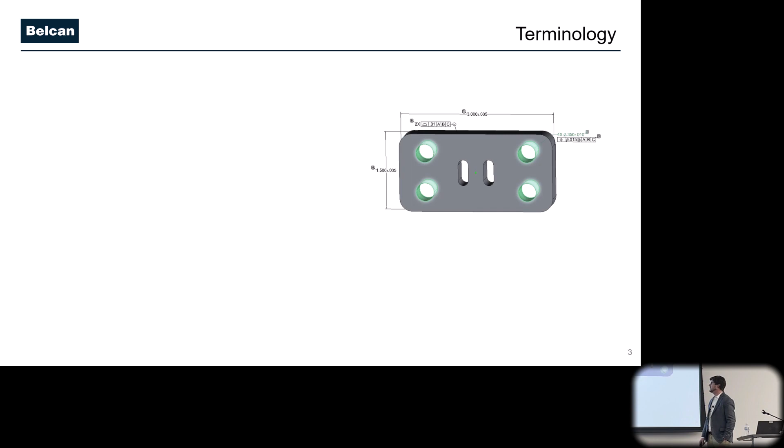So we're going to dive into some terminology, and I'll go even deeper in terminology here in a few slides. But we think about characteristic, okay?

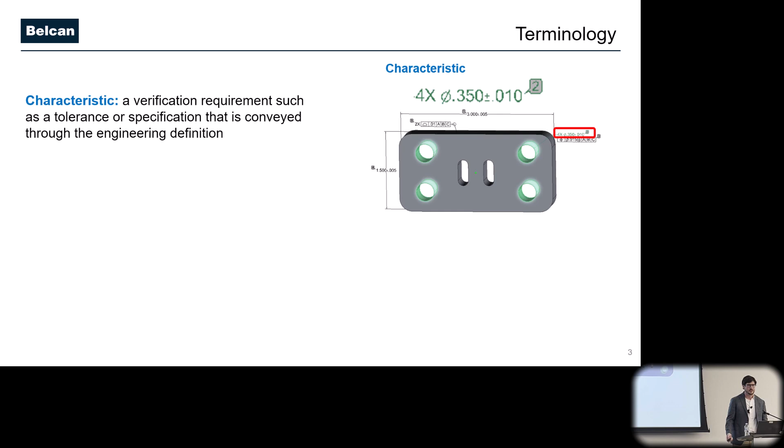This would be the dimension, the tolerance that we're authoring, whether it's in a 2D drawing or within our model-based definition. Okay, but we ultimately want to establish a characteristic tag, and this would be the graphical tag that's both human and machine readable, that is applied to our characteristic, our requirement.

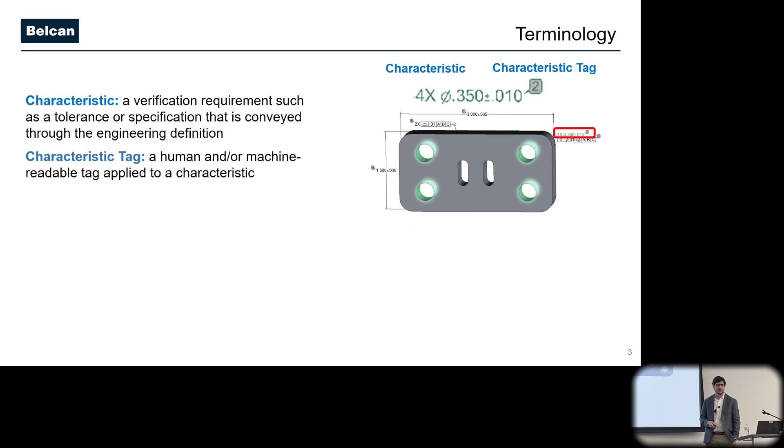And then we have our bill of characteristics, which would be compiling all of my product characteristic tags into a single bill of characteristics, and Daniel Campbell walked us through the bill of characteristics within QIF.

And then we have characteristic accountability, right? Ensuring that all of our characteristic requirements have been met with traceability through the verification process and with verification results. And so we're going to walk through this process in detailed steps throughout the presentation.

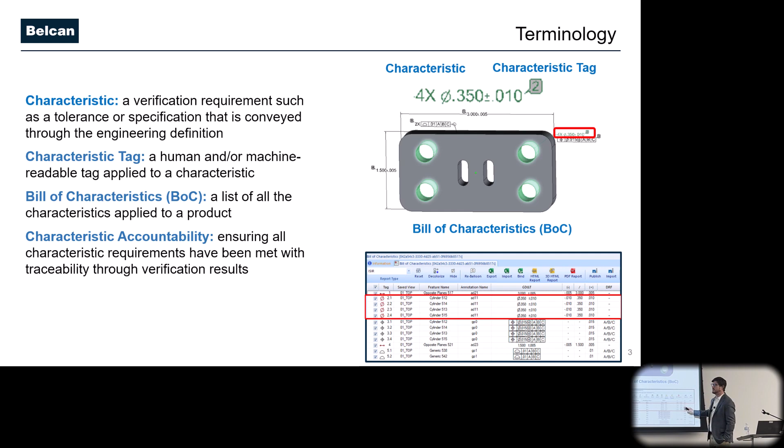I don't know if Daniel mentioned this, but you can go to QIFstandards.org to download this standard right now. All right, so I highly encourage you to do that.

So let's talk about characteristic accountability. Today, many of you are probably doing this within 2D drawings, okay? And if you pay attention to the bar at the top, when we think about an OEM versus a supplier, right? At an OEM, you're creating drawings today.

You're authoring product definition across very specific views on multiple sheets, right? Lots of product definition. You're assigning 2D specifications to those individual requirements, whether it's through 2D notes or other methods of assigning additional specifications that need to be characterized. You're releasing and issuing this product definition within your own internal OEM, but then once it gets to the supplier, or we'll call that the producer domain within manufacturing or your supply chain, they're going to characterize this data.

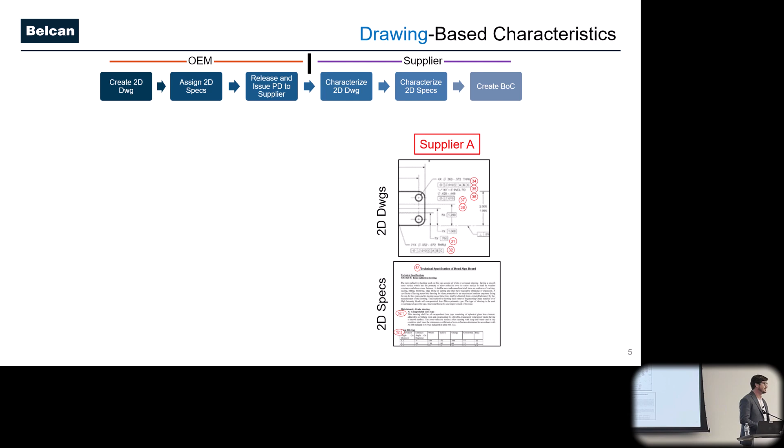So they're going to characterize the 2D drawing manually, okay, assigning characteristics. And they're also going to characterize the 2D specifications manually. And they're going to compile this into some type of a spreadsheet, into some type of a database. But our complete bill of characteristics, we're calling it complete, is happening at the end of the process.

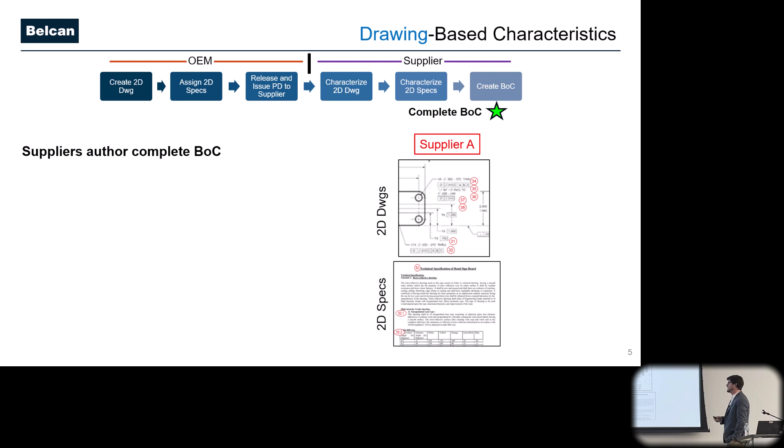All right, and that's going to be key as we move forward. So there's gaps in the digital thread. And so some of these gaps are, when we think about a single source of truth, that the characterization isn't unique, right? Or it is unique, I guess, across each supplier.

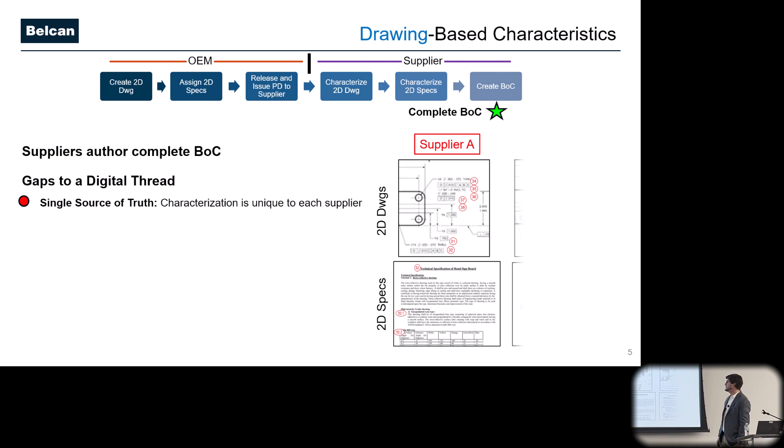So if we have multiple suppliers involved, and I had some conversations with individuals here at this conference, where you are characterizing for a single part across multiple suppliers, but those characteristics are not persistent across those suppliers, and that is an issue. This process is really time consuming, right?

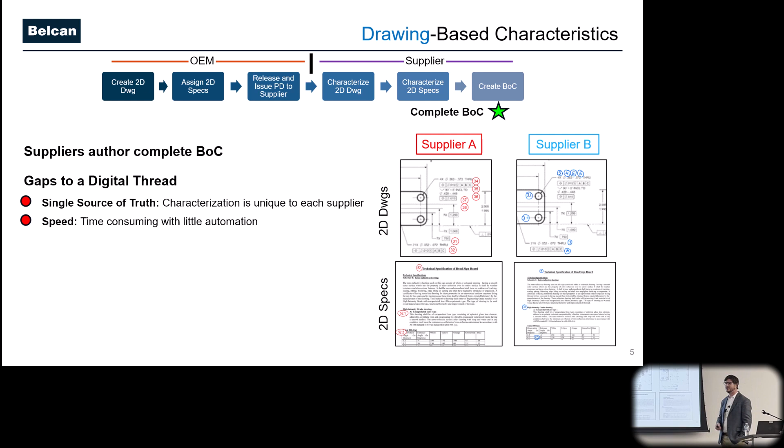It's manual, right? And it's also error prone. Okay, so from a quality perspective, it's error prone. From a traceability perspective, right, it's a very manual effort, and it's hard to align these characteristics to inspection results. And interoperability, bill of characteristics does not support machine workflows. Okay, so this is a very, very manual process.

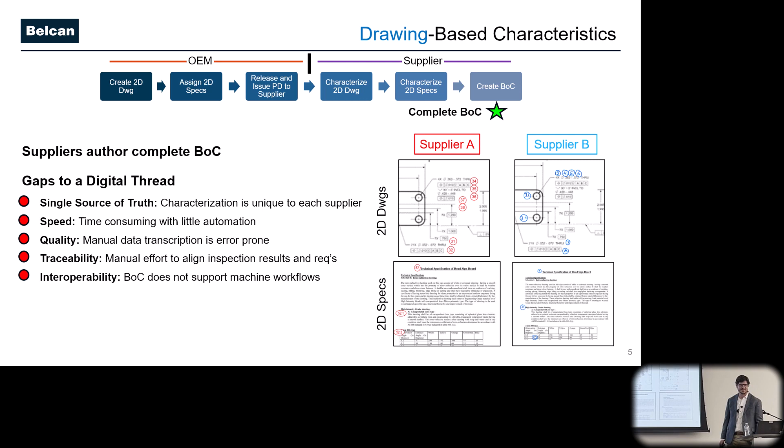All right, so let's talk about model-based definition. Sorry, I'll go back if you want to get a picture of that. Yeah. There you go, pause.

So when we think about model-based definition, this was a slide we've seen at 3D CIC, Jennifer, you talked about the elements of model-based definition. When we break it down, this was brought up at 3D CIC, and we share the same opinion, that the elements of model-based definition consist of geometry.

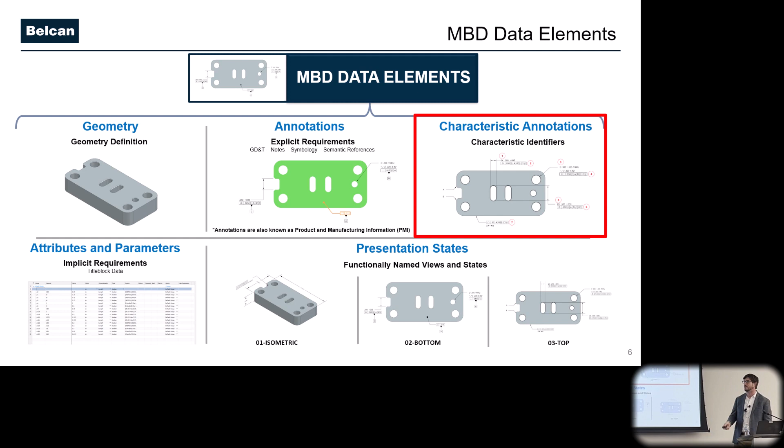That makes sense. But we also have annotations, all the requirements we're authoring across our presentation states. That's another element. Then we have attributes and parameters. But more importantly, we have characterization. We see that as a fifth element we can author within model-based definition that brings a lot of value for persistent IDs across multiple suppliers, persistent characterization across revisions. We'll deep dive into that in a little bit.

So if you look at the top, you'll notice the bar has changed a little bit. We're going to do a bit more work up front in our process to characterize our data before sending it off within the supplier domain.

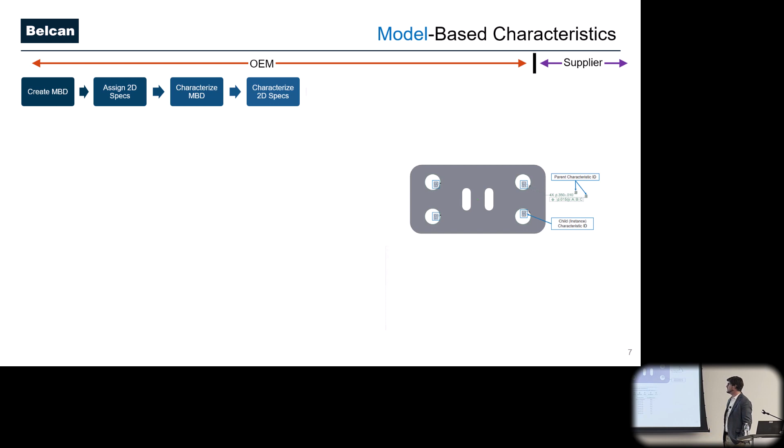So we need to characterize, or create our model-based definition. We're going to author all of our product requirements within our model-based definition. We're going to still assign 2D specifications, but we're going to characterize our model-based definition up front. We have our parent characteristic or child characteristic tags that we'll talk about in a little bit. Then we'll characterize our 2D specifications, and merge all of this to create a single bill of characteristics comprised of both 2D and 3D requirements.

And then we're going to leverage QIF, the Quality Information Framework, that format Daniel just talked about, to leverage within our downstream workflows, and then consume that into the supply chain.

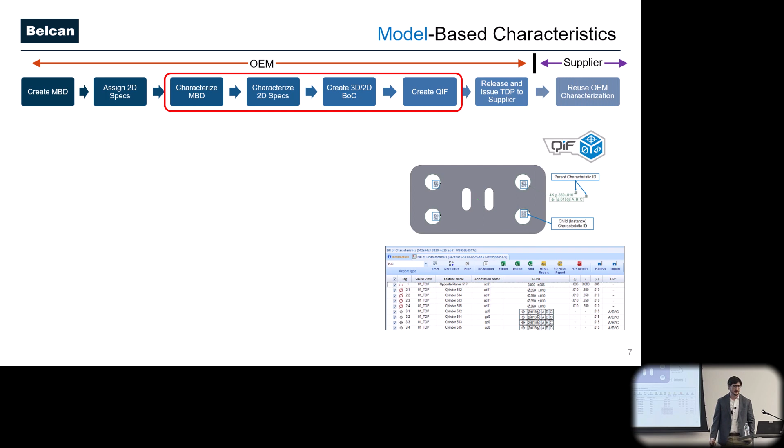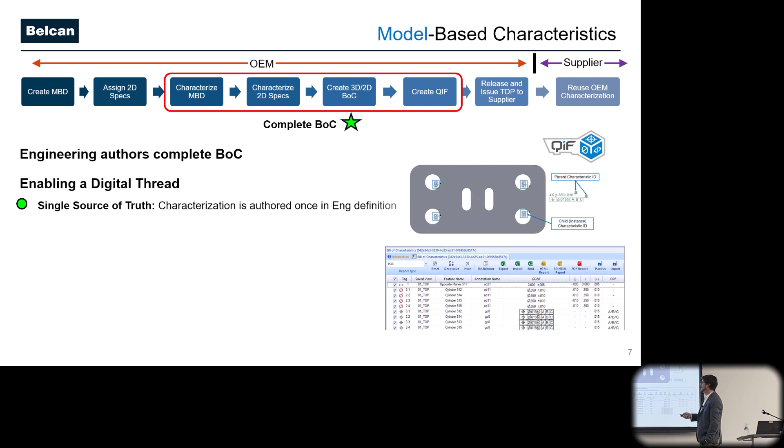All right, so now we're shifting our characterization left in the process, up front in engineering. This is enabling the digital thread for all of those shortcomings we just talked about in the 2D workflow. The characterization is now authored within the engineering definition.

When we talk about speed, automation - we're now doing this through a machine-readable format, and able to characterize our product definition up front using third-party software tools. When we think about quality, we're removing the human in a good way, so it's no longer error-prone. This is a software-integrated automated process.

So we have unique characteristic IDs, now persistent throughout all of our revisions and all of our suppliers. And we have data interoperability and consistency throughout.

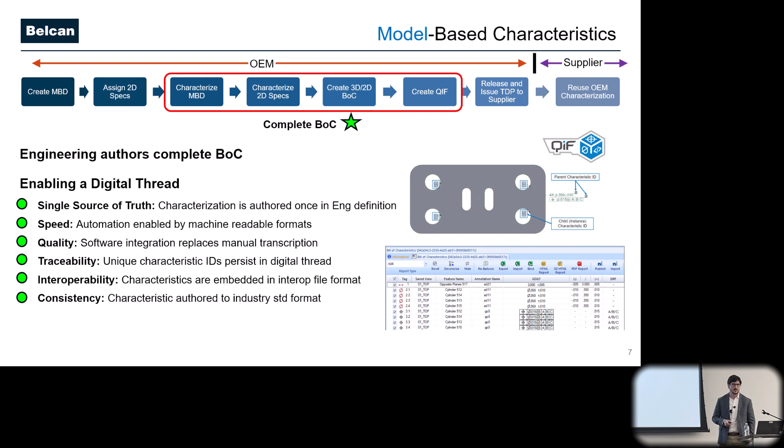So let's take a look, now that we've framed up what characteristics look like in a model-based environment, at a characteristic accountability workflow. We'll be using this diagram as we realize all of these process steps for consumption.

Starting off with our 3D model-based definition, we're going to showcase how to characterize your data up front in model-based definition, and then leverage QIF MBD to use within our quality workflows. We'll showcase how to characterize 2D specifications using OCR technology, and then unify our 3D and 2D requirements into a single bill of characteristics.

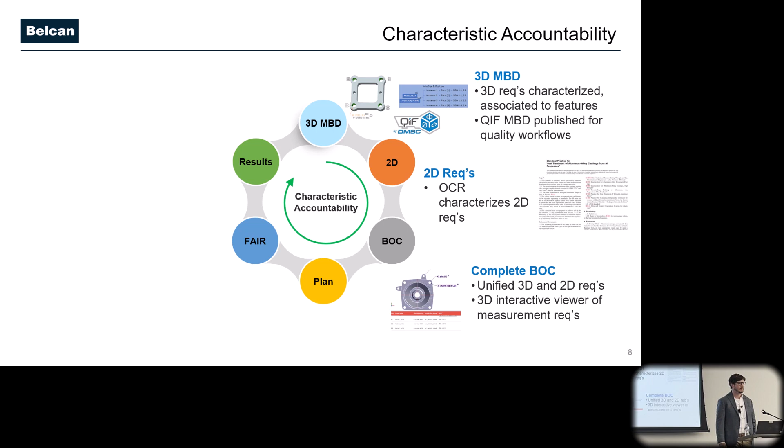And then we'll leverage that bill of characteristics within our downstream metrology software to perform measurement planning and automate inspection routines, and even generate first article inspection reports automatically. Then we'll bring it all together to showcase the as-manufactured, the as-inspected back to the as-designed, comparing those measurement results back to the as-designed using QIF.

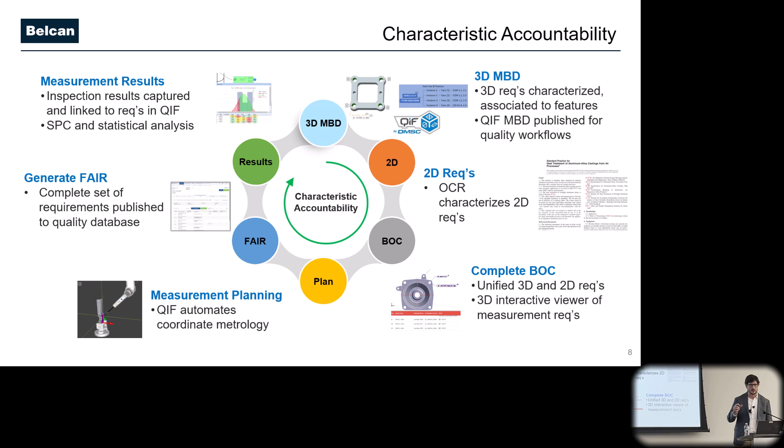So we'll start off with our 3D model-based definition. Before we get into that workflow, I want to talk a little bit about the emerging standard, the model-based characteristic standard developed by the DMSC. This is the same standards organization that's developing the QIF standard that Daniel Campbell just got done talking about.

And in June of last year, this was submitted to the ANSI Standards Organization to be approved as an ANSI standard, and that should be soon.

So this is a quite lengthy document. It deep dives into nomenclature, definition, and symbology for model-based characteristics. And it identifies specific types and categories for characteristics and their optional augmentations.

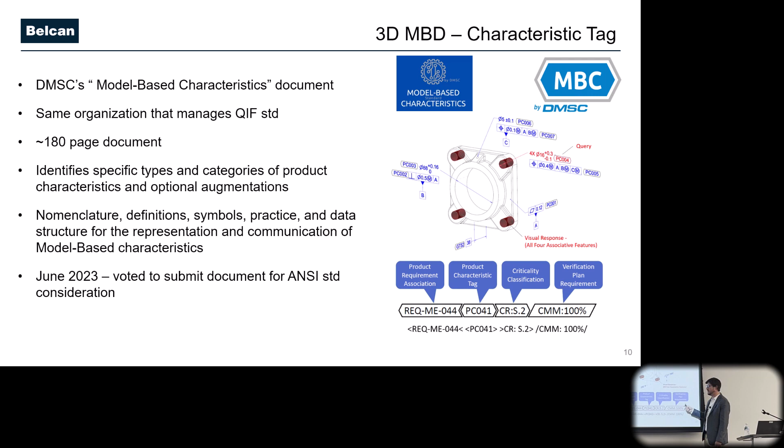So this is a product characteristic tag, the elongated hexagon, and its optional augmentations are being draped on either side of it. We have augmentations like criticality classification, product requirement association, and even a verification plan if one is desired.

So there are two primary product characteristic tags that I want to talk to you guys about. Hey, let there be light.

So this is a screenshot of the QIF derivative, where we've authored product definition. This is showing a single view of one of our presentation states. So we've got a light show, and I have lots of product definition that I've authored.

You'll notice that I have visual, graphical product characteristic tags that you see here. These are our product characteristic tags, also known as, maybe don't hate me, parent tags.

I've assigned product characteristic tags. These happen to be assigned to a pattern of 4 holes. And because I'm associated to a pattern of 4 holes, I also have instance tags, the children of my parent characteristic tags.

You'll notice that for my instance tags, I'm reusing the parent ID, and I'm also giving it an instance ID of 0.1. I have a feature of size dimension and a position tolerance. And you'll notice that each hole respectively, in all of its parent IDs, have the same instance ID for each hole respectively, which is awesome.

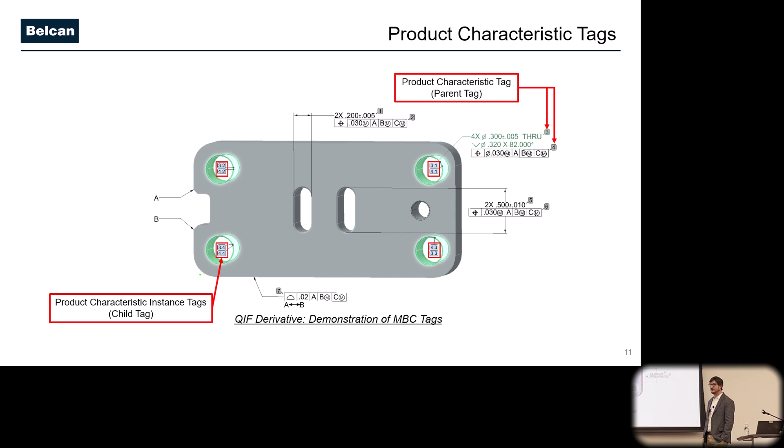When we look at a bill of characteristics, this is a screenshot of Net-Inspect's software for visualizing the bill of characteristics. Just to deep dive a little bit into the information that's within a bill of characteristics, as we generate QIF and visualize our bill of characteristics...

One thing I want to note here is that we have a universally unique identifier that's being associated for each QIF file. This is more at a top level. As I generate QIF across revisions and even versions, we need to ensure that QIF files can stand on their own. Within the bill of characteristics, here is a look at the pattern of 4 holes that I just got done discussing in the previous slide.

So the bill of characteristics is giving me some information. I have my characteristic IDs, both for parent and instance IDs, and even the presentation state that they originated from, which is really nice. This is the information that's been extracted from our native CAD.

We also have our measurement feature or measurement object. Daniel talked a lot about the features that are being generated within the QIF file. This is going to play a really big role as we import this data into our downstream metrology.

The type of features that we have here, you'll notice that I have cylinders, and that's key. A lot of what I get here is dependent on the way we author our product definition up front in our native MBD. Now, I'm not going to go down that rabbit hole, but I could author this in such a way that for my feature of size dimension, my associated features, my semantic references, are cylinders.

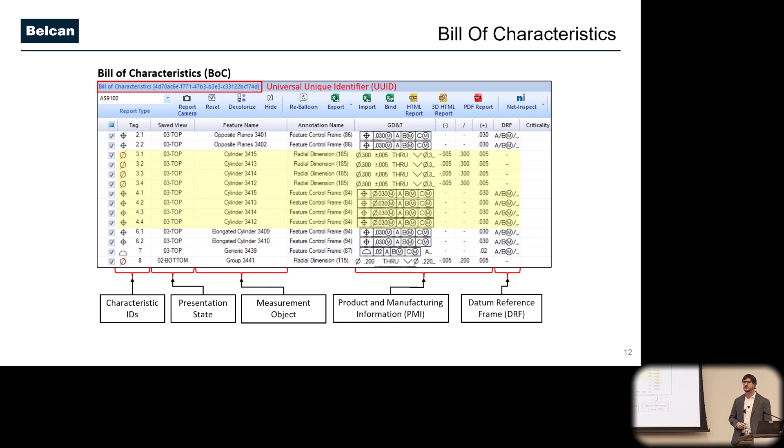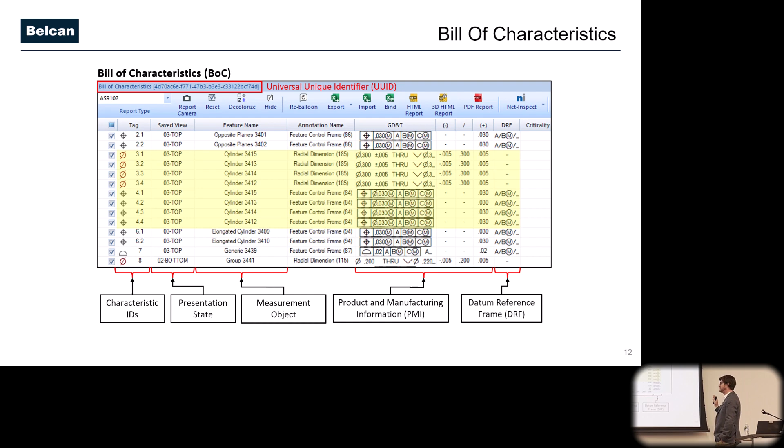I'm also getting information like product and manufacturing information, so that's the PMI, and also access to visualize my datum reference frame. Now, this doesn't have to be just a tool used for quality and manufacturing to view this information. I think it's really important that we start to shift this up front in engineering to be leveraged as a tool to understand how my product definition is being decomposed, not only from a human perspective, but from a machine readability perspective prior to release.

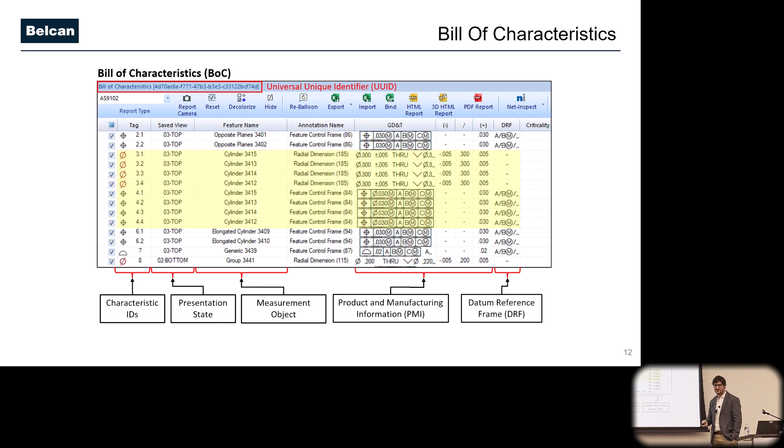A lot of times we're not looking at this data until after it's been released. And if there's an issue, what do you do? Right? Or we go back and spend a lot of money to go fix it. So let's talk about generating a QIF file.

You'll notice that to generate QIF, I'm going to start off in my native CAD. I'm showcasing Siemens NX, but this is a CAD agnostic workflow - so insert your CAD system here. Okay, so it doesn't have to be Siemens NX.

I'm authoring product definition across multiple presentation states, and I'm even authoring characteristics in this scenario. Those are represented by these red balloons. So I'm characterizing my product definition.

There are third-party tools out there to help you characterize your product definition up front in your native CAD, and that's where you get those benefits of persistent IDs across revisions. Many of you, probably all of you, are using 3D viewables today. So now your downstream audience can visualize those characteristics in your 3D viewable in addition to seeing them as they're being consumed within your downstream process.

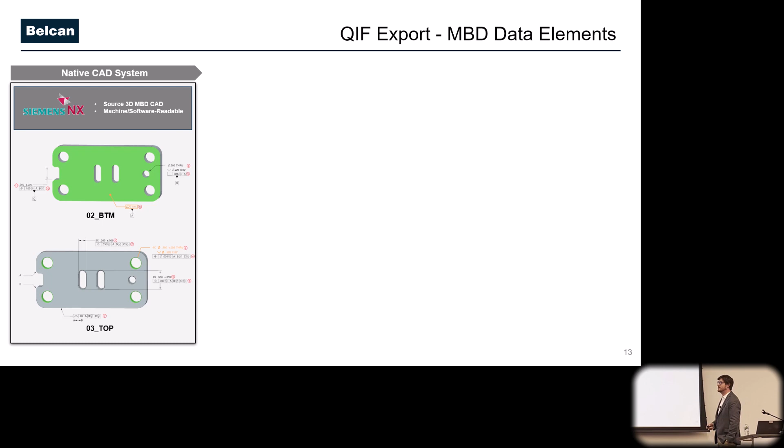So as we export to QIF, in this scenario we're using MBD Connect for NX. MBD Connect exists for all major CAD systems.

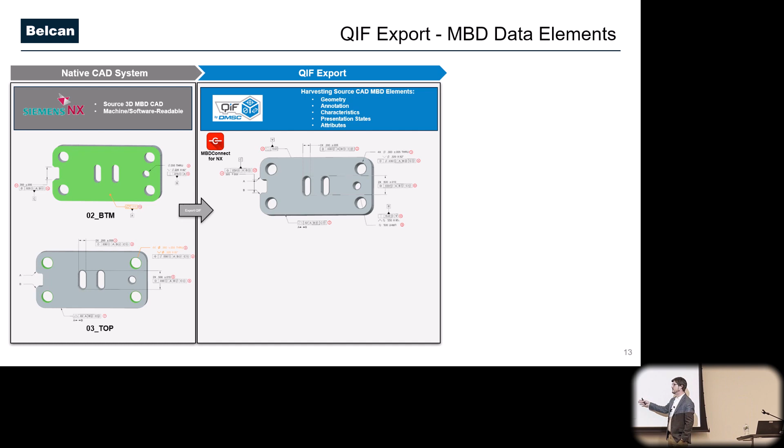We're going to be harvesting information from our native CAD system. So we're harvesting geometry, all of the PMI across all of our presentation states, and even our characterization in this scenario, where QIF, as they assign characteristics, is going to honor the characteristics that were already assigned within my native CAD to generate my bill of characteristics.

But this bill of characteristics only represents the requirements that are in my model-based definition, right? So my general notes and all the PMI that I've authored across all my presentation states. It doesn't include 2D specifications.

That'll come next. I do want to note there's a lot of benefits of authoring characteristics up front, leveraging the DMSC standard, the model-based characteristics standard. But you can also have a lot of value by assigning characteristics within your QIF workflow. The one big thing to note is that the source of truth for characteristics in this workflow is up here in my native CAD. But it's completely acceptable for your source of truth for characteristics, as you generate those, when you export QIF, to exist right here.

So there's still a lot of value. We need to validate our QIF prior to consuming our QIF within our downstream workflow, to ensure that it is fit for use.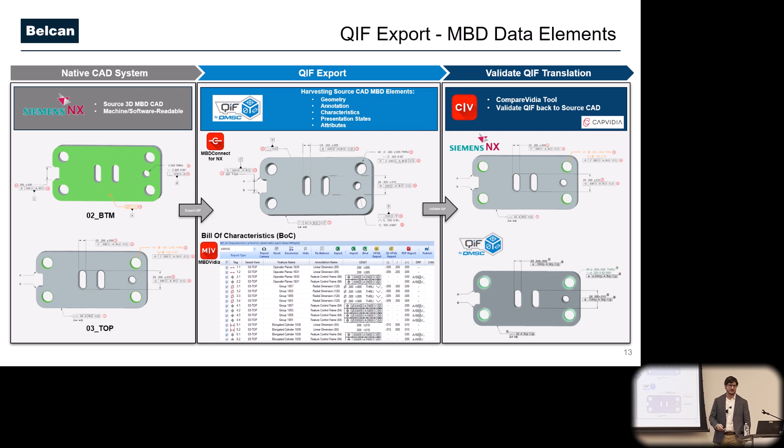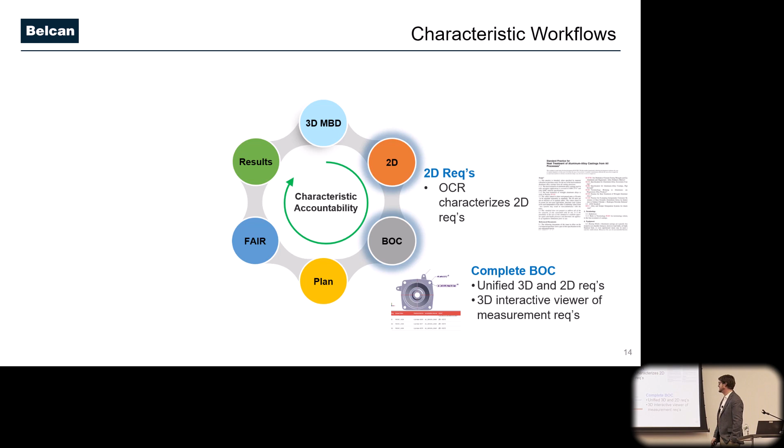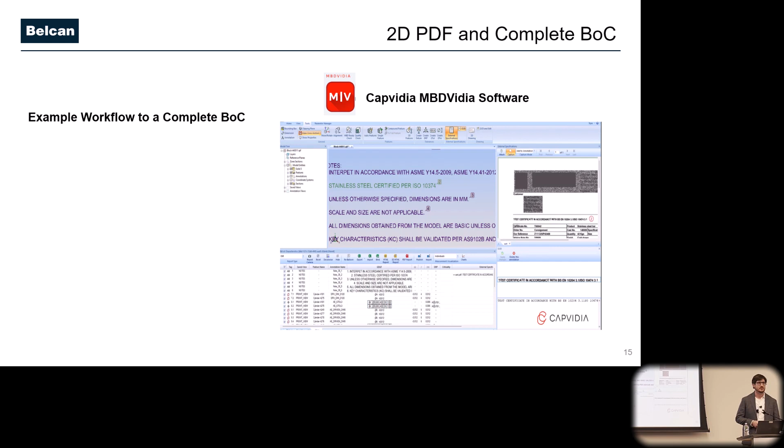All right, let's talk about 2D characterization. Let's bring 2D specs and characterize that 2D data and bring that to the table. So in this scenario, I'm taking the QIF file that I just generated from my native model-based definition. I'm importing this into MBDVidia, and you'll notice that I have a set of general notes, and one of these notes calls out a 2D specification, and that happens to be an ISO standard.

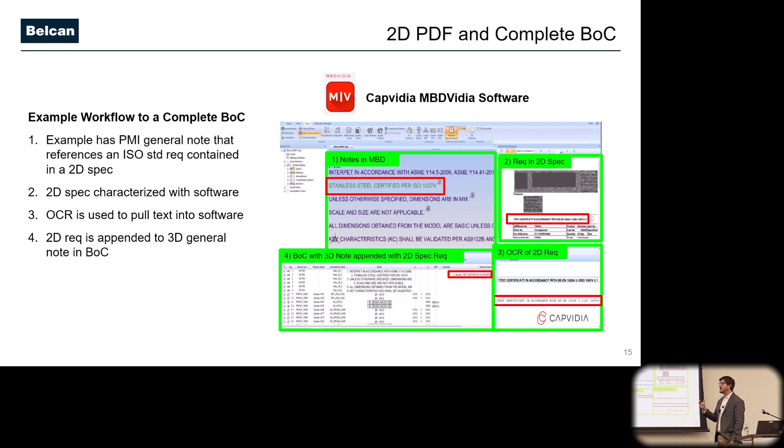So I need to go and pull that 2D specification, that ISO standard. I'm going to import it into MBDVidia software. I'm going to characterize all the requirements that I have to comply with. And then using the built-in OCR technology, I'm going to harvest this text and insert it into my bill of characteristics. So now I'm merging my 2D and my 3D requirements into a single, complete bill of characteristics, and I'm doing this up front in the process, which is even more important.

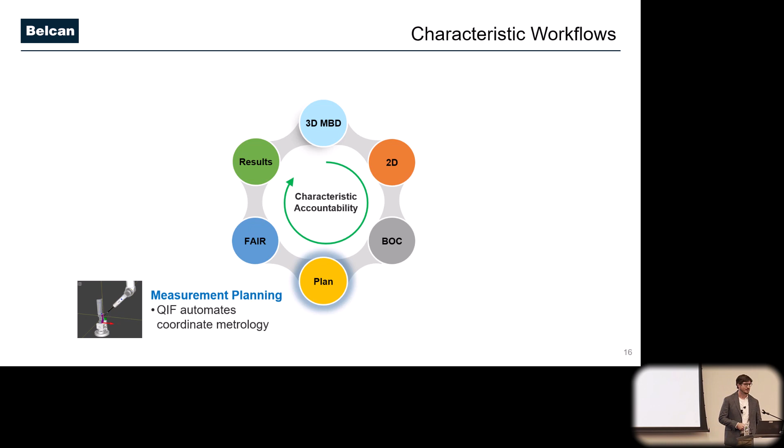So a very, very powerful workflow. So now we have a complete bill of characteristics, and I'm going to import this into my downstream metrology software.

So in this scenario, starting off with MBDVidia, I'm using that complete bill of characteristics using QIF, and I'm going to import this into PolyWorks Inspector. But there are a lot of other metrology softwares out there, and actually many of them are here today. Metrologic, Codem, Zeiss Calypso, right? So a lot of these major metrology platforms have this capability of importing QIF.

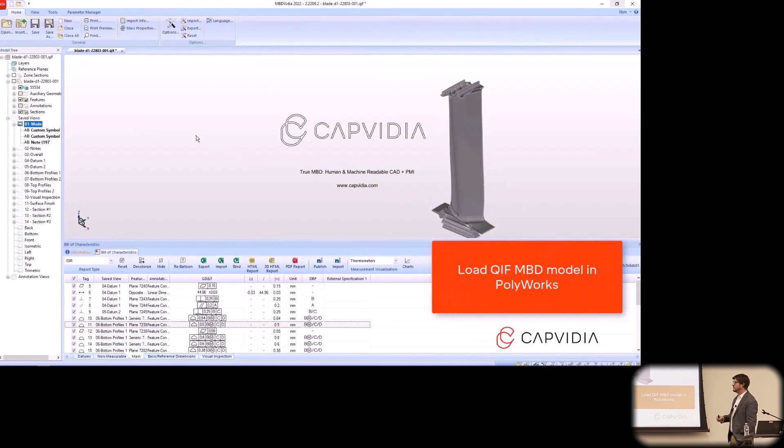So now we're going to extend the digital thread into my metrology platform. Starting off inside of MBDVidia, now this is just a contrived part, but I'm going to massage my bill of characteristics, import my 2D specifications, and once I have that, I'm going to import this into PolyWorks Inspector. And it's going to import my geometry, the PMI, my characterization, and all of those measurement features.

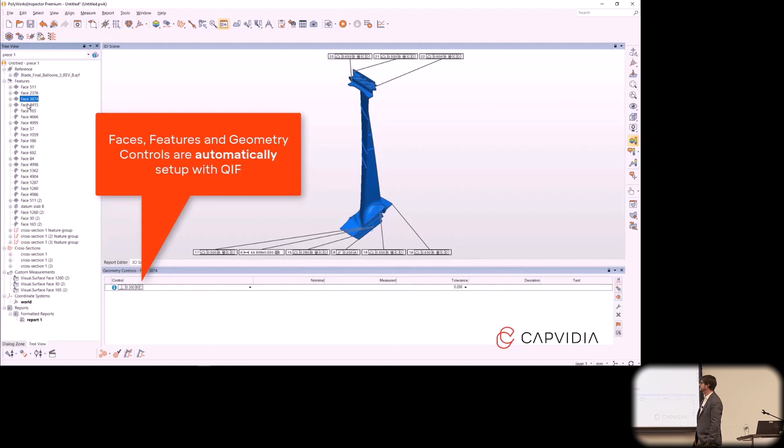And you can see all the measurement features as they're displayed here, and all of the PMI that are controlling or that I need to comply with on those specific measurement objects. I can also see all of the PMI across the presentation states to ensure that it imported properly.

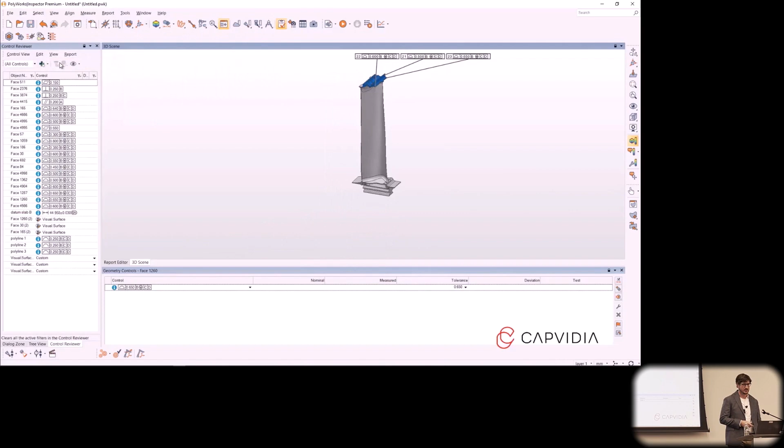And inside of PolyWorks Inspector, they call these control views. So I can see all the data and how it's organized by each presentation state as I look back at my native CAD to ensure that it imported properly. So now I have my bill of characteristics inside my metrology software.

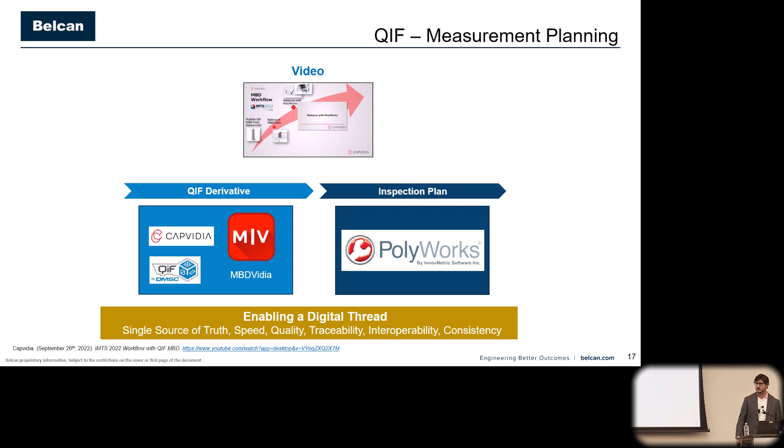I'm going to perform my measurement planning and inspection. At the same time, I can generate first article inspection reports. There are multiple methods of generating these reports. One is using MBDVidia and using very elaborate Excel files. But we can also upload and export our QIF, our bill of characteristics, and upload that directly to NetInspect.

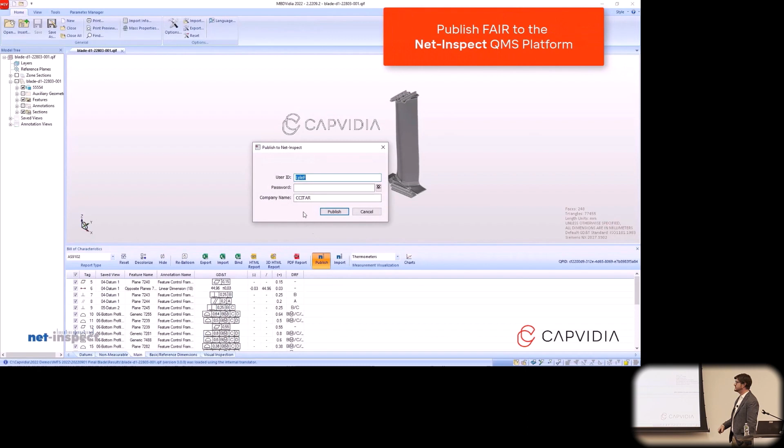And this is a collaborative environment. So directly within MBDVidia, I have a publish button to NetInspect. So once I've massaged my bill of characteristics, I've injected my 2D specifications with my 3D, I can upload this into NetInspect, where I've predetermined first article inspection reports and templates, and I can send this data downstream to my supply chain or even within my own internal manufacturing facilities to perform first article inspection.

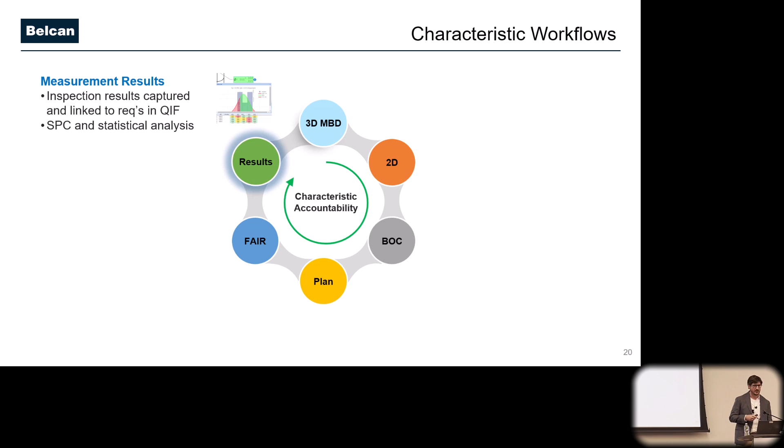And next, we want to visualize these results. So let's bring it all back together using QIF. We want to look at the as-manufactured, the as-inspected, back to the as-designed.

I have a couple of different workflows. This one is bringing the data back from NetInspect. So PolyWorks Inspector, the metrologist has uploaded this data into NetInspect for first article inspection, and I'm going to bring that data back into MBDVidia to visualize these results.

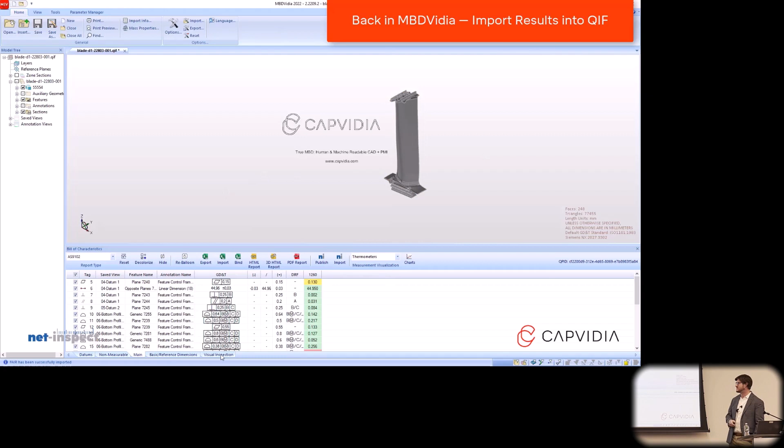Just as easy as it was to publish this information, I'm now going to import the data. I'm going to log into NetInspect and pull these results back in. You can see that it pulled in a single part with all of its reported values. But if I wanted to do a 30-piece capability study, I can certainly do that, and bring in as much data as I desire to get some pretty trend charts.

All right, so now I can visualize that data directly back to the nominal, looking at each individual requirement within my bill of characteristics. It's really, really powerful.

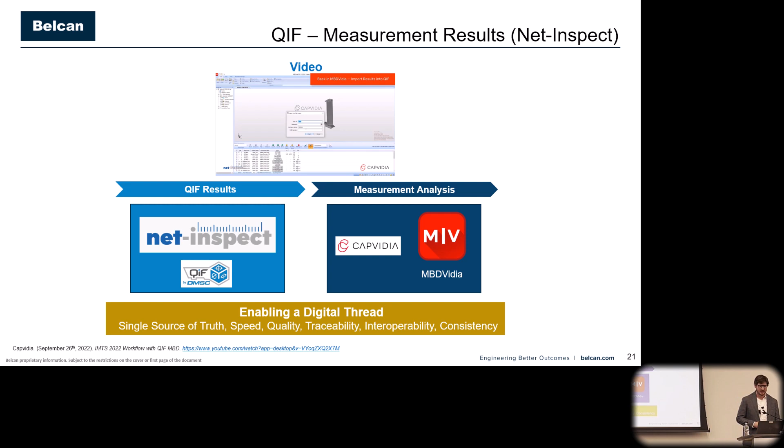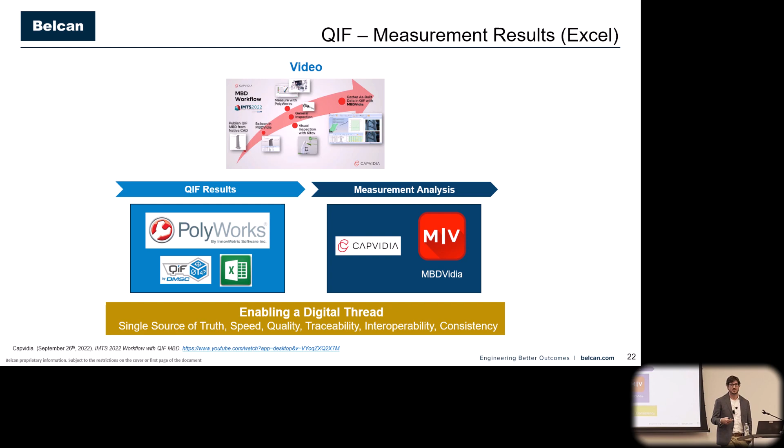The other method I wanted to shed light on is more of a manual method—we'll call it the data sidecar, or the poor man's QIF. I can generate an Excel file up front of my bill of characteristics, send that file to my downstream metrology, and they can backfeed the results into that Excel file. Then I can bring it back into MBDVidia the same way I imported data from NetInspect. It's okay, in some cases we need to take baby steps.

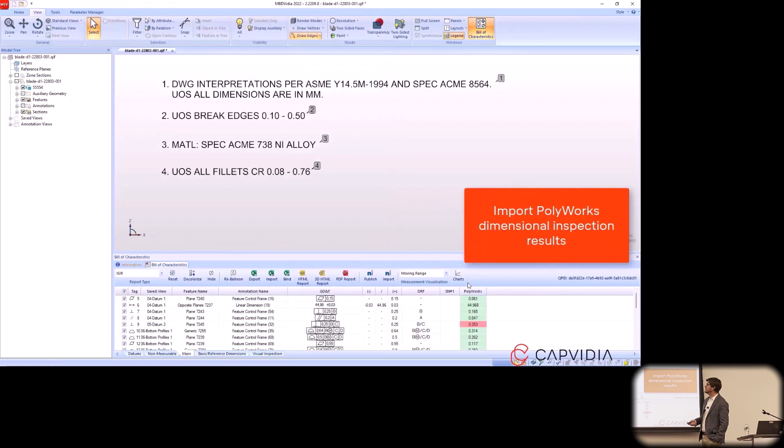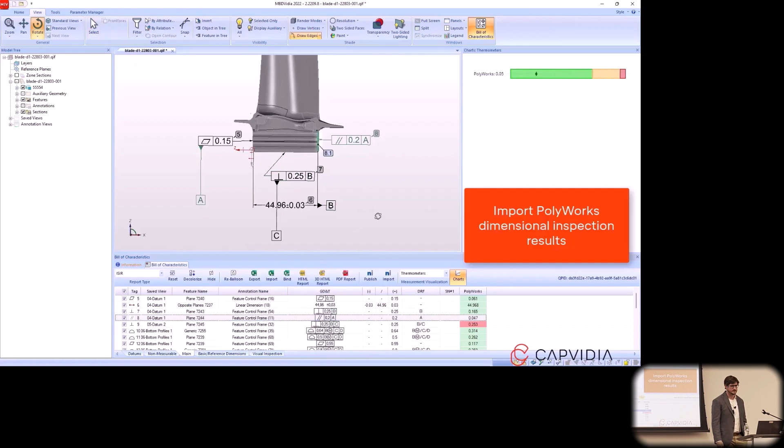So in this one, very same workflow: we're going to import an Excel file that we got back from PolyWorks Inspector, and I'm visualizing these results the same way, mapping that data back to each characteristic to understand and complete my disposition as needed. So there were two different workflows there.

If you want to know more about how QIF can improve data interoperability, last year Belcan wrote a blog deep diving into QIF. It talks more about what Daniel Campbell was discussing this morning, and goes further into these specific workflows. You can scan the QR code—these slides will be available to you, but many of you are already taking pictures, so that's fine.

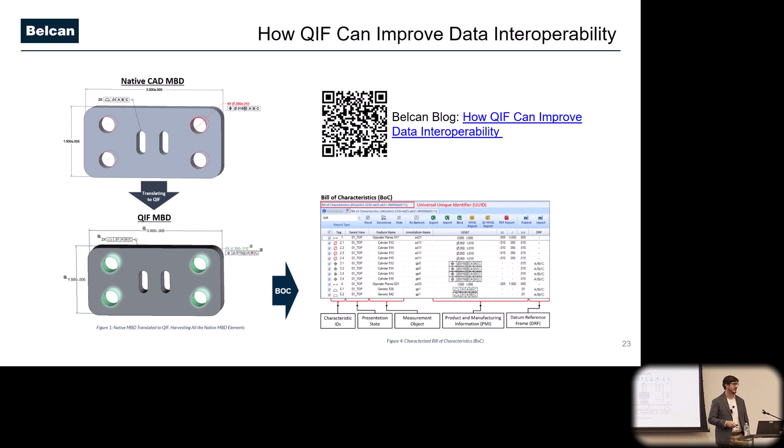So wrapping things up—I don't know how I'm doing on time, but that's okay. So how do we start? Starting your transformational journey around model-based characteristics, and some foundational elements.

The first one is shifting your characterization left in the process. Traditionally this is performed downstream in the producer domain or maybe in quality, and it's done manually—time-consuming and error-prone. We want to shift this left in the process, up front in engineering. I highlighted a couple of methods for doing that: characterizing your data within your native CAD, or even assigning characteristics at QIF export. Shifting your characterization left in the process is extremely important.

Now you have persistent IDs across your lifecycle. We want to author a complete bill of characteristics—that doesn't include just the characterization from your model-based definition, we also need to include 2D specifications. When you think about a complete bill of characteristics, what's the percentage that actually comes from your model-based definition? It's 60%? Yeah, so we need to account for the other 40. In some cases it might be the opposite, where 40% comes from your model-based definition and 60% comes from your 2D specifications. So we need to focus on generating that complete bill of characteristics upstream.